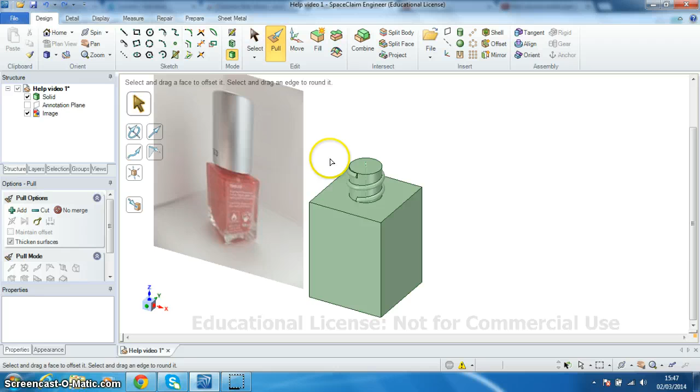Right, in this video we're going to concentrate on making the cap. In the previous video we made the bottle using the pull command and the revolve command to make the helix around the outside of the neck.

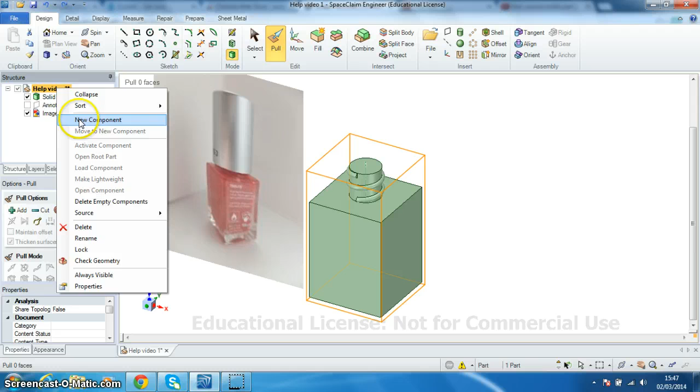So to make the cap, the first thing I need to do is recognize that it's a separate component, a different part to the bottle. As it's a separate component, I need to go over to the structure tree, right click and create a new component. I'm going to call that cap. As you see, it's gone bold. A component in the structure tree that is in bold means it's active, so that's the one I can actually edit at this moment in time.

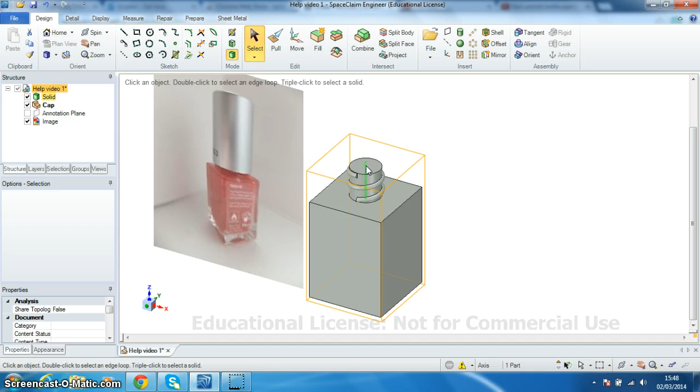Right, so let's start off by choosing select. Find the center line of the neck, the center axis, click on it, and choose sketch mode and plan view. That's a little awkward on the screen, so I'm going to hold down shift and the center button of my mouse and drag that over to the bottom of the screen. I'm going to hold down control and the center button of my mouse again just to zoom in.

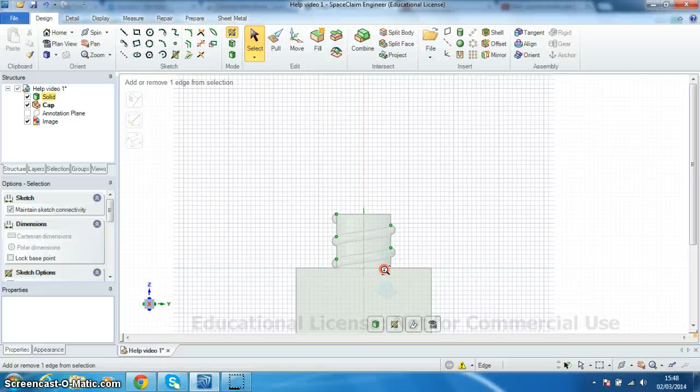Now I'm going to choose the rectangle button. I'm going to draw a rectangle that goes from the center of the neck out, something like 12 millimeters wide by about 30 millimeters tall, which is ample.

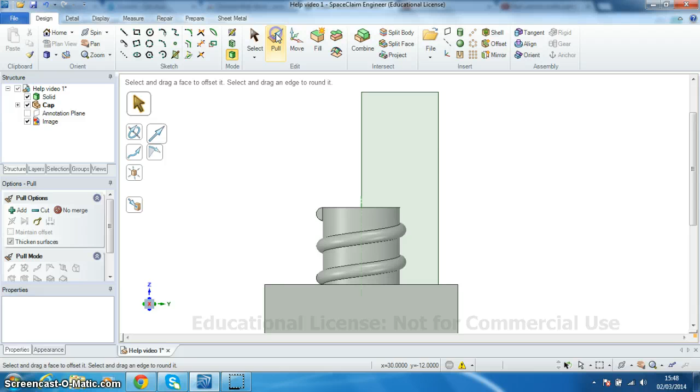Now I'm going to choose pull, choose that rectangle, add material, click on revolve, select an axis to rotate about, or the axis I want is this edge. Now I can just click on the full pull button or the play button. You see now that encases the neck of the bottle.

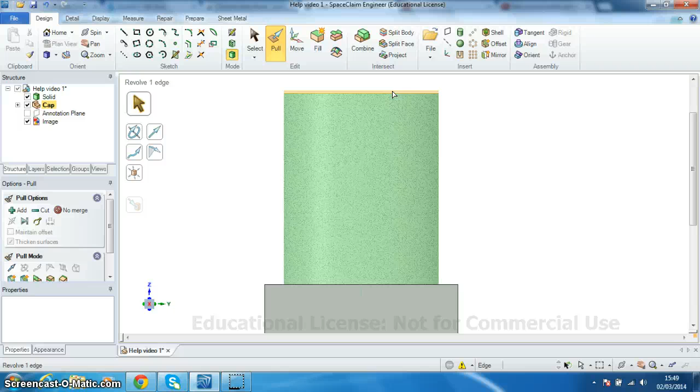Okay, so let's just go back to home. There it is there, so we're starting to get our nail varnish bottle. The next thing I want to do then is cut away from the cap the shape of the neck.

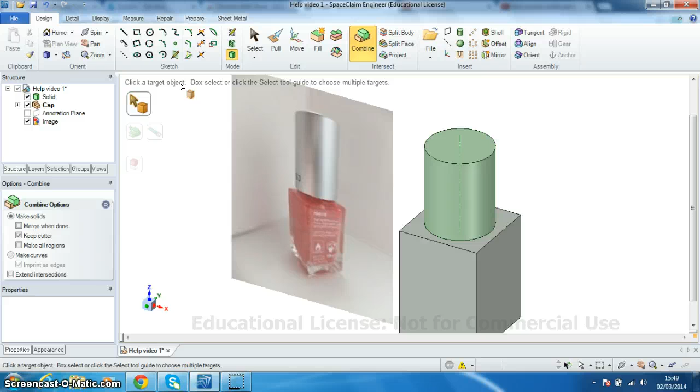Now to do that I'm going to use the combine command. So if I click on combine, again we get a message here, click a target object. The target object is always the object you want to do something to. In this case it's the cap. Click to select a cutter object, well that's the bottle itself.

Click regions to remove. Now the regions to remove is the neck. I want to remove the shape of the neck from the cap. Now if I hover my mouse over the cap, you can probably see the neck as well as the cap has turned a mottled pink.

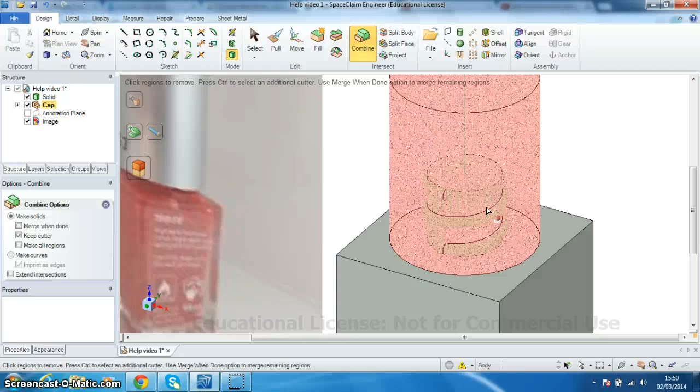The region I want is actually that bit there. Now all I've done there is rotate the wheel of my mouse. So I've gone from it being the cap and the neck, rotate the wheel of my mouse to just the neck. Once I've got just the neck selected, I can click for a third time. Now what that means is we've now just cut away from inside this cap the shape of the neck.

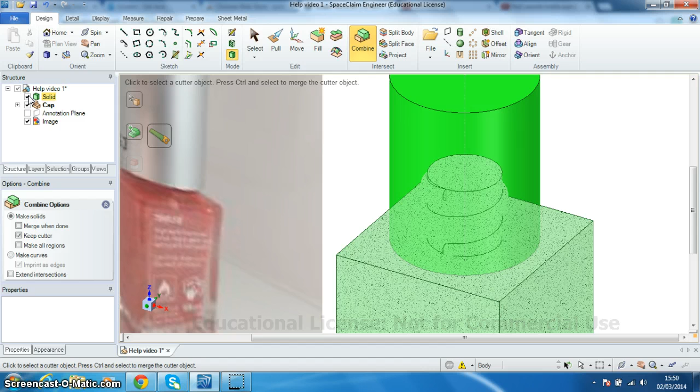So to prove that, I'm going back over to my structure tree. I'm going to turn off this solid, which is the bottle, and I'm just going to rotate the cap around. So you can see just inside there, look, we've got our thread and a cavity, same shape and size as the neck of the bottle. Let's put that back. Okay.

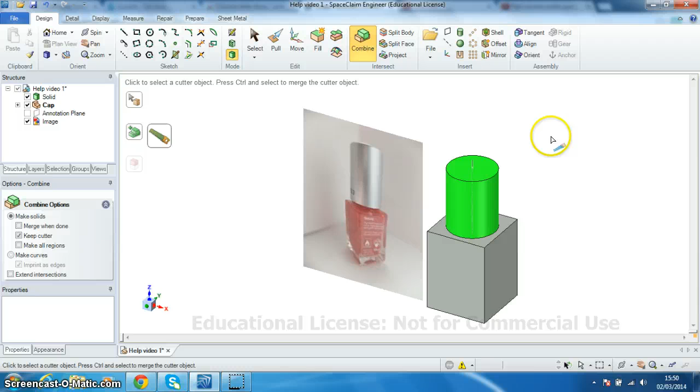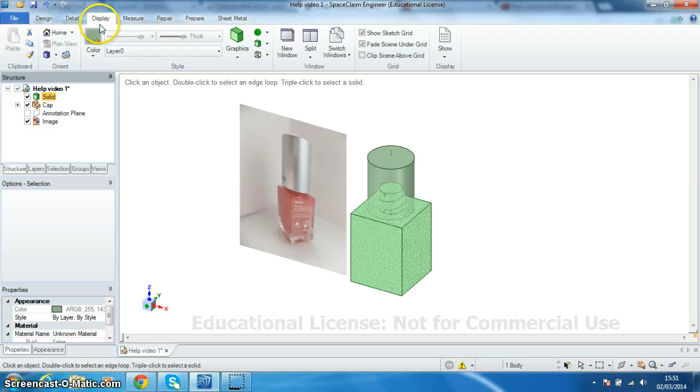So I'm going to right click now back on our main component, or the bottle, activate component. I'm going to choose solid. If I go to select, sorry, and choose solid, click on display, I then have these graphics tools here. I'm just going to click on transparent. So now you can see through the bottle.

Now most nail varnishes, as far as I know, have got a brush in them. So let's have a look at drawing that.

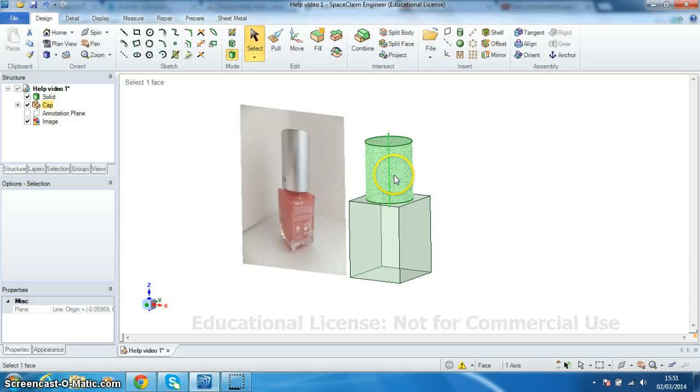So back to the design tab, select, I'm going to choose the axis again. Now this is in the cap. Because it's part of the cap I need to reactivate the cap. So right click on cap, activate component, new sketch, plan view.

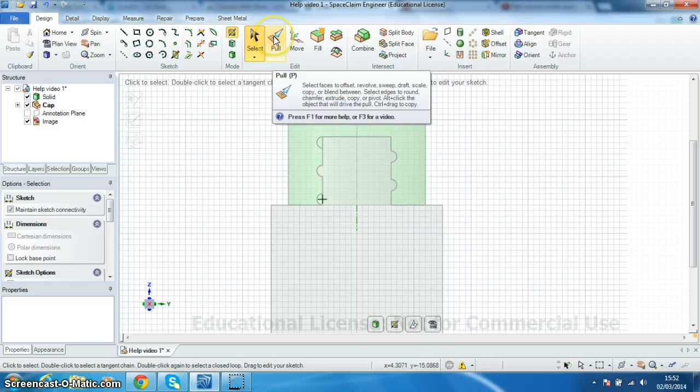Okay. Once again I'm going to draw a rectangle coming down from the cap. You see I've done it to the right of the centre line. And then I'm going to draw another bigger piece here, and this is going to be my main attempt at doing a nail varnish brush.

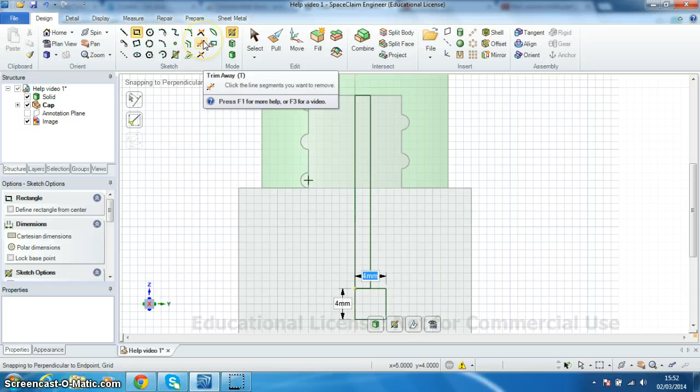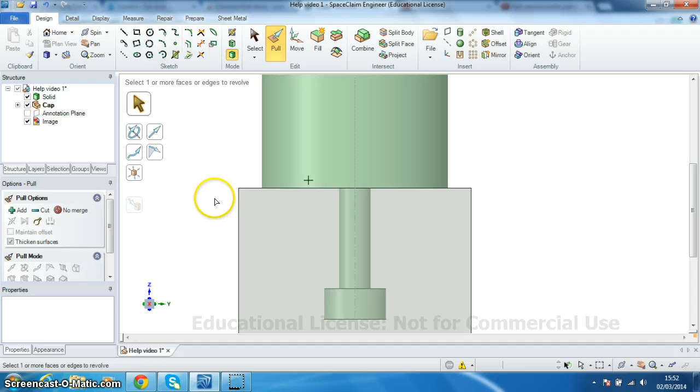I need to use the trim away command to trim where lines are not required. I'm going to go to pull, choose that shape, add material, revolve, choose the center line again, click on full pull, and then we've got my very quick attempt at a nail varnish bottle with a brush.